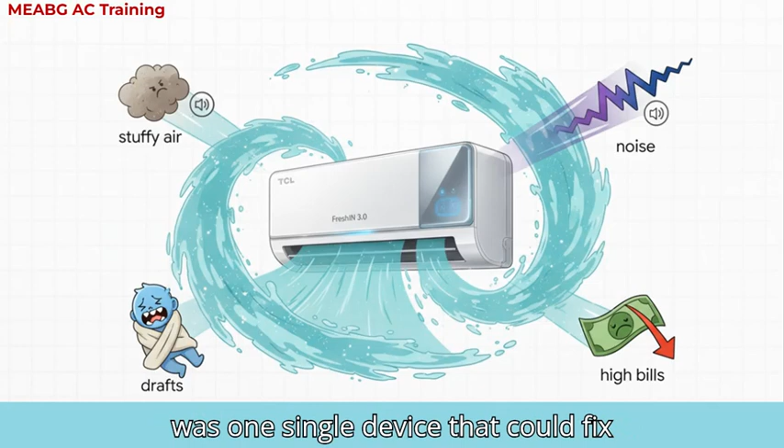And that's our cue. This is where the TCL FreshIN 3.0 steps in. The very first thing you need to get is that calling this thing just an air conditioner, well, that really doesn't even begin to cover it. Here's the whole idea behind the TCL FreshIN 3.0.

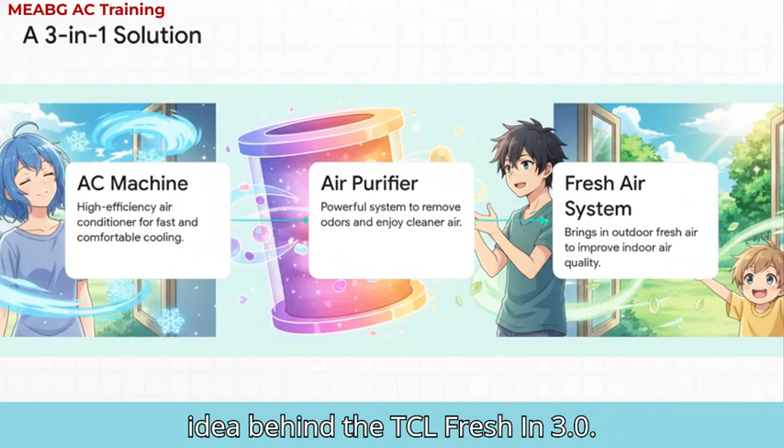It's not one thing, it's three. It's a super efficient air conditioner, yes, but it's also a high-end air purifier and a fresh air ventilation system, all packed into one sleek machine. It's basically a total air solution for your home.

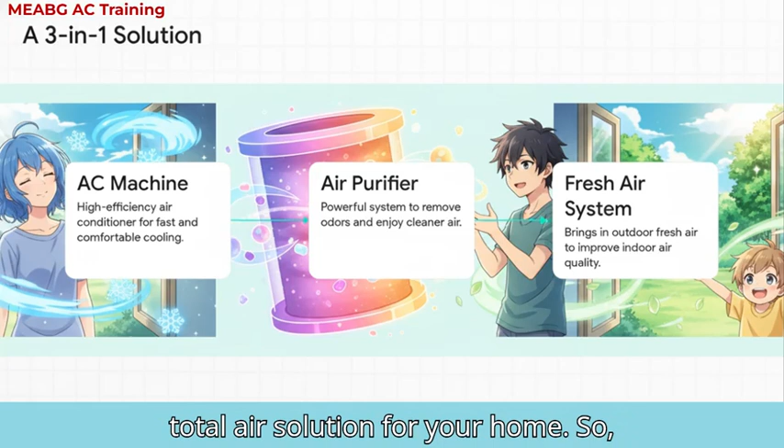So let's kick things off with what I think is the most groundbreaking part of the TCL FreshIN 3.0: its focus on the health of the air you breathe. This is a total game changer.

The magic behind it is TCL's FreshIN technology. So instead of just recycling that stale indoor air, it actually goes outside, pulls in fresh air, but then, and this is the key part, it purifies it, gets it to the exact temperature you want, and then gently releases it into the room. You end up with more oxygen and a way healthier space to live in.

So how do you even know it's working? Well, the TCL FreshIN 3.0 makes the invisible visible. It's got a built-in TVOC sensor that's always sniffing the air for harmful stuff. And then this display ring gives you a simple color-coded update.

If it's blue, you're golden. Yellow means it's okay, and orange tells you the system is getting to work on some unhealthy air. It's literally peace of mind you can see.

The secret weapon for getting that air so clean is the Quadrupuri filtration system. And listen, this is not your typical flimsy dust filter. This is a serious 4-layer defense system against all kinds of nasty stuff floating in the air. Let's break it down really quick.

Layer 1 grabs the big things, like dust and hair. Layer 2 uses silver ions to take out bacteria. Layer 3, and this is a big deal, is a true HEPA filter.

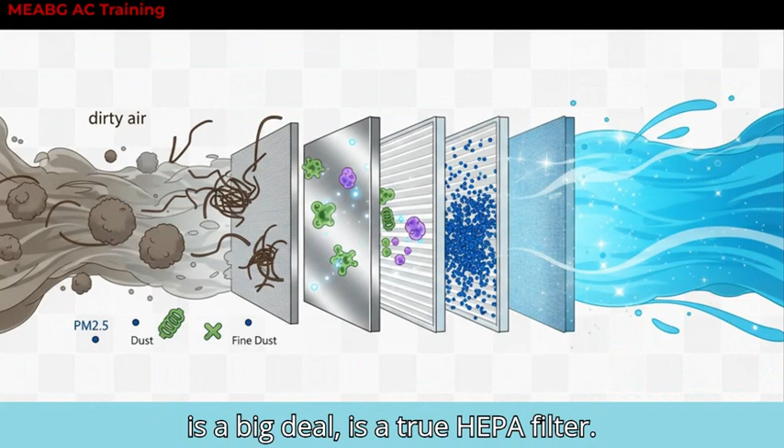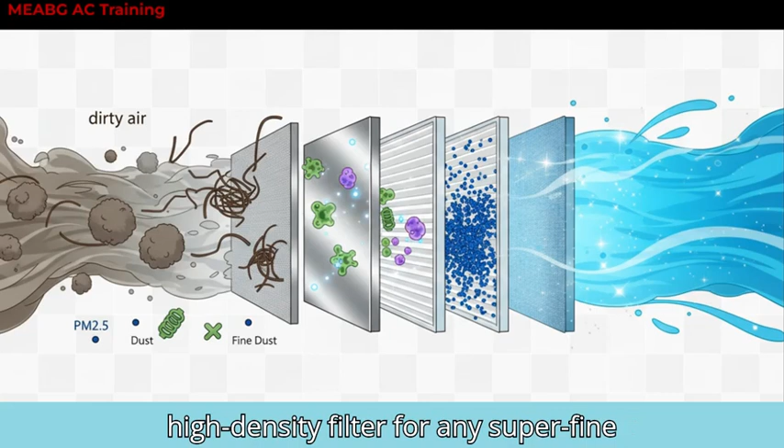That's the gold standard for trapping those tiny, harmful PM 2.5 particles and allergens. And the final layer is a high-density filter for any superfine dust that's left. That's what real, comprehensive purification looks like.

Okay, so you get all this amazing fresh air tech. It's got to be loud, right? Nope. In its fresh air mode, the TCL FreshIN 3.0 runs at a mind-bogglingly quiet 16 decibels.

So what on earth does 16 decibels sound like? It's literally as quiet as a needle dropping on the floor. Just think about that for a second. That means you can have perfectly fresh, clean air without any distracting noise.

All right, so the TCL FreshIN 3.0 gives us healthy, clean, and super quiet air. But what about that dreaded electricity bill? Well, this is where the story gets even better. This chart says it all, really.

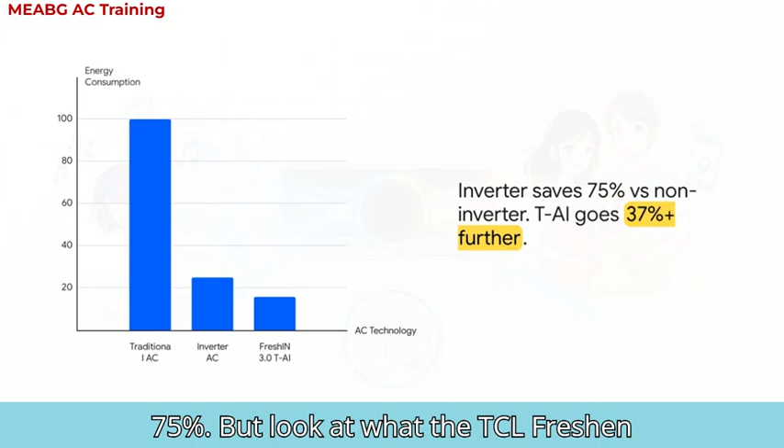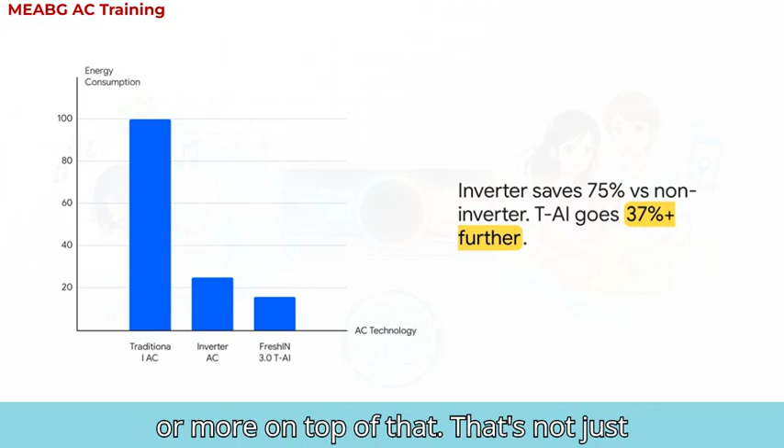Just upgrading from an old-school AC to a standard inverter saves you a ton of energy, like 75%. But look at what the TCL FreshIN 3.0 does. Its smart TAI algorithm is constantly learning and optimizing, saving you an additional 37% or more on top of that. That's not just an improvement, it's a massive leap in efficiency.

And it's not just one thing, it's a whole energy management system. It's got the best-in-class A++ energy rating. It has that brilliant TAI algorithm working in the background. You can actually watch your power consumption in real time on the app. And if you have spotty power, there's a Gen mode to intelligently manage the power draw. The TCL FreshIN 3.0 puts you in complete control of your energy usage.

And that level of control brings us to the final piece of the puzzle, all the smart, intuitive features that make the TCL FreshIN 3.0 just so easy to live with.

Now check this out, picture this: the Smart Arrive and Leave Home mode uses your phone's location. When you leave the house, it turns itself off to save power. Then, when it sees you're getting close to home again, it automatically turns back on, so you walk through the door into a perfectly comfortable room. It's not reactive, it's proactive comfort.

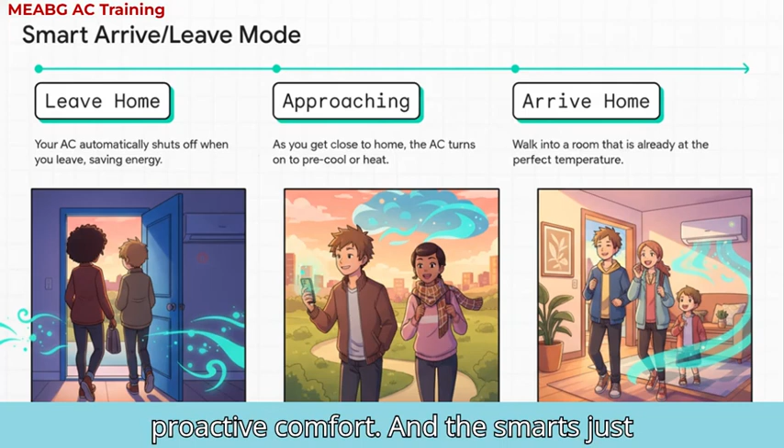And the smarts just keep coming. Of course, you can control it with the TCL Home app or with Google and Alexa. But how cool is this? It has offline voice control, so you can still talk to it even if your internet goes down. It also learns your personal habits, has a light sensor that automatically dims the display at night, and this is insane: it's built like a tank, designed to work in crazy temperatures, from a blazing 66 degrees Celsius down to a freezing -25.

So when you put all of that together, the health benefits, the incredible efficiency, the smart intelligence, you start to see that the TCL FreshIN 3.0 isn't just a better air conditioner, it's something else entirely. It's in a new category.

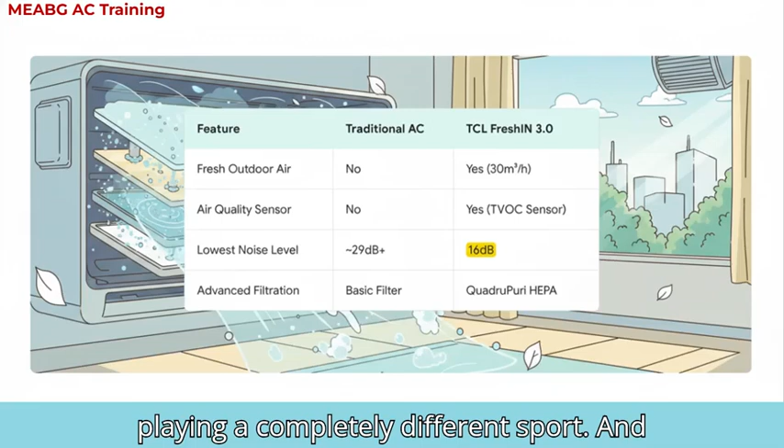And that really brings us to the final thought here. After seeing that it's actually possible to have a single device that cools, purifies, brings in fresh air, saves a ridiculous amount of energy, and intelligently fits into our lives, is just making a room colder really good enough anymore?